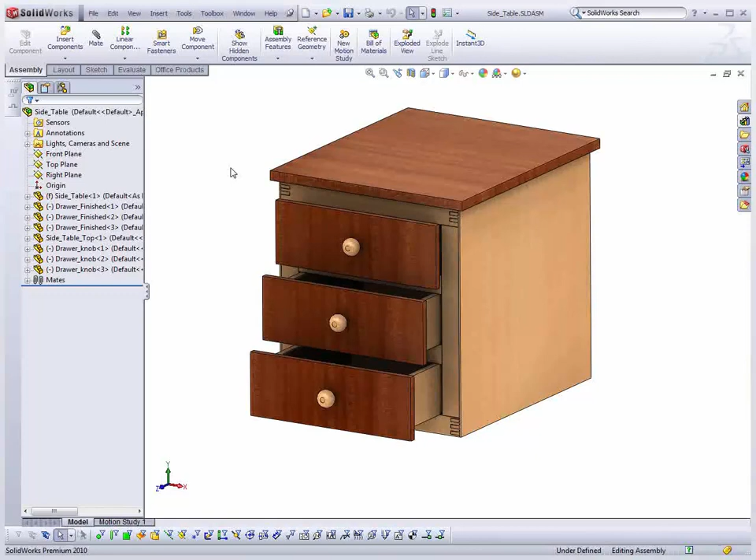BOM though, which is really the nice one here. With the bill of materials, even at the assembly level, we can get a lot of cut list information as well. You can see here we've got our different components, comprised of all the different elements with different materials and so on. We've got their stock size, as well as the rough cut sizes, as well as the length of the different components and quantities. So it's a nice way to summarize what you need in your system.

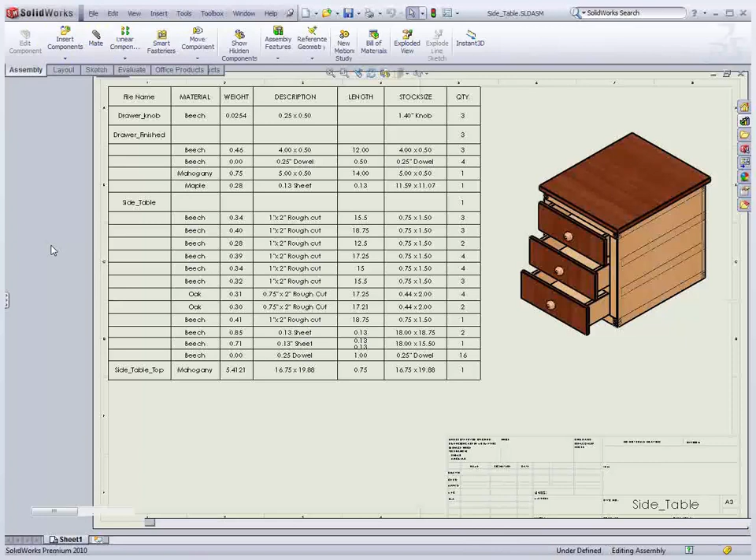You can see if we look at the side table, I've got some finger joins in here, and I just got a view without the walls, so we can zoom in. You can see we've got dowel pins connecting the components together, as well as the finger joins.

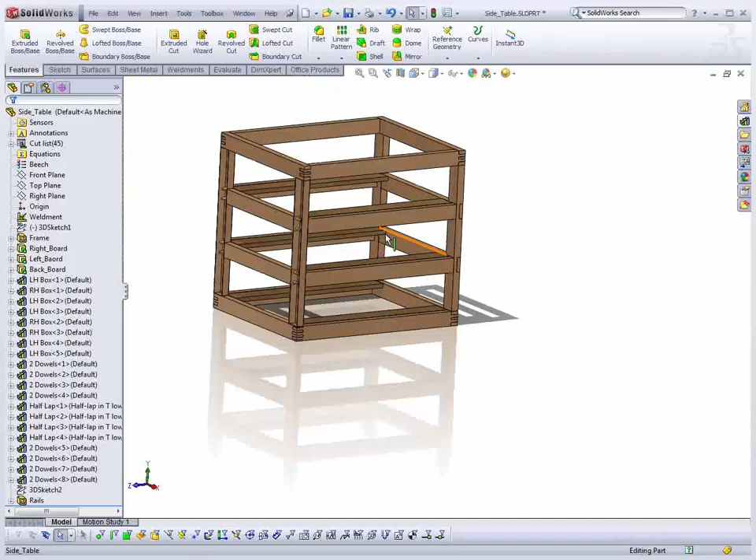Again, nice ways of actually making sure you've got secure systems. You see we've got lap joints on the back here to join those up as well. So a lot of flexibility in the types of connections we can use to make sure we've got a really tight system.

Let's take a look at the drawer. This is one where you can probably demo this live pretty quickly and easily without too much trouble. You can see I've got two finger joins on here, as well as the automatic tray or back panel inserted. So let's just show you how that recessed back panel works. It's really nice.

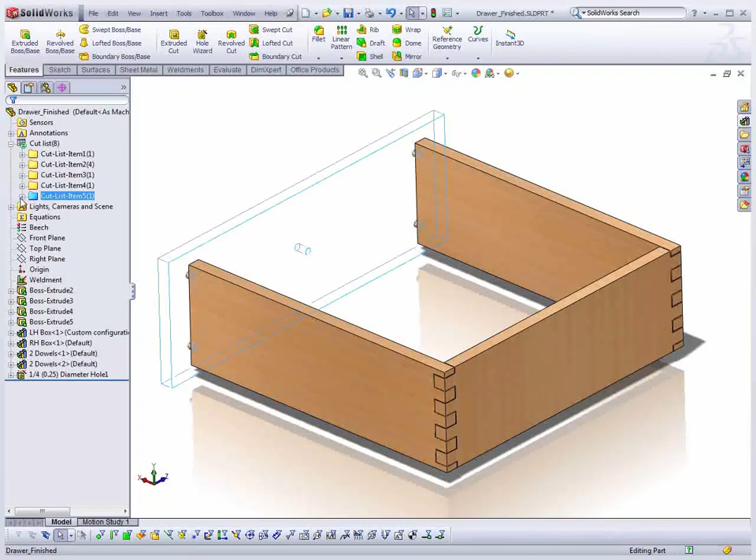Just let me double check that one. Alright, so with the back panel, just go to miscellaneous, and we've got recessed panel. Drag and drop that in. So we're going to do an indented one. You could do it flush, but it doesn't make sense.

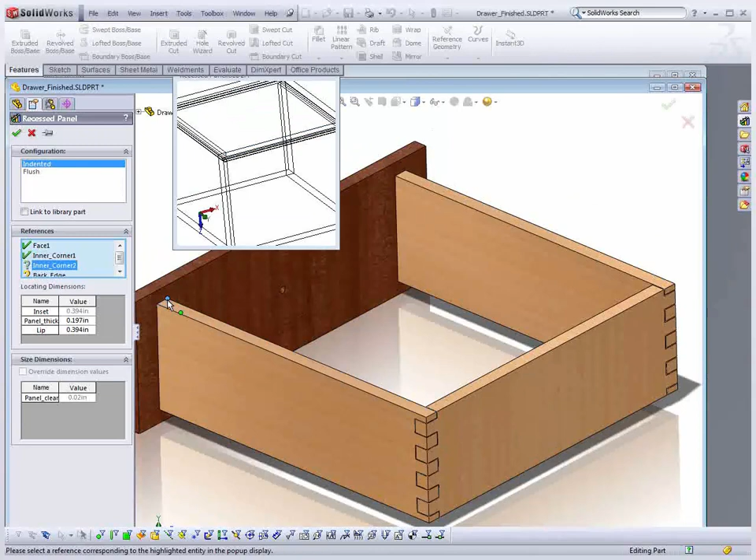So what we're going to do is pick the top surface, say this one here, and then we start doing corner to corner. So pick that corner to this corner, and then the back edge.

Now with these panels, it's just a matter of making sure the inset, so let's say 10 millimeters, and then the panel thickness, let's say 1/8, and then the lip, we'll say 1/8 as well.

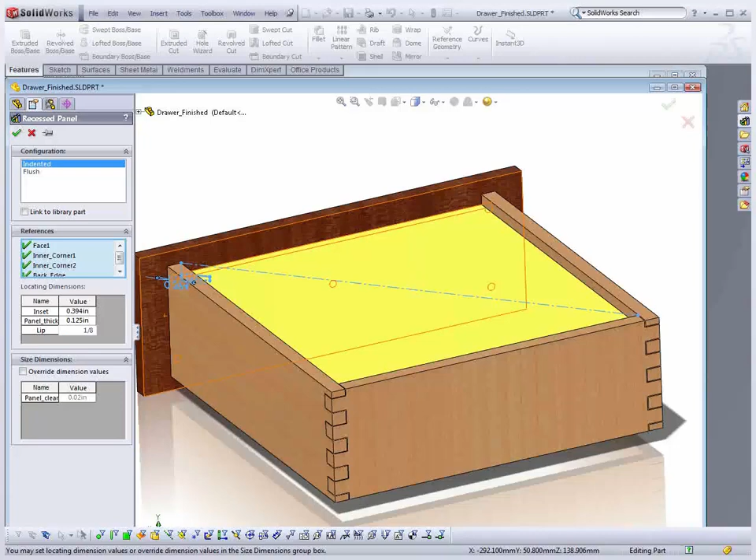And there's our panel. If we do a section cut, you can see in there we've even got a little clearance designed around it, which you can adjust if you want as well.

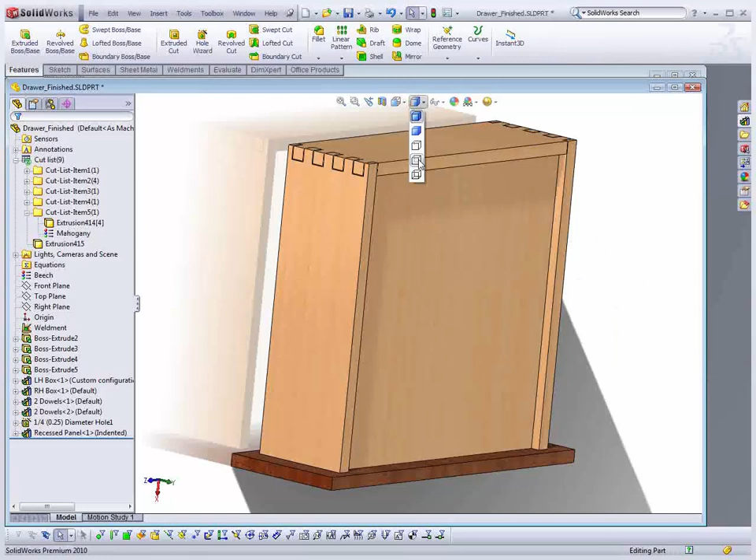I also got a hole here for the drawer knob, which goes into the system. And if we have a quick look in wireframe, you'll see I've got dowel pins, I think they're like 1/2 inch long, also joining the drawer front to the sides to give it a really nice solid build. So again, it's a lot of power and capability in here to really make excellent woodworking products.

And so there's the knobs in this overall assembly. And again, they're smart mated so that they insert and snap straight to the holes.